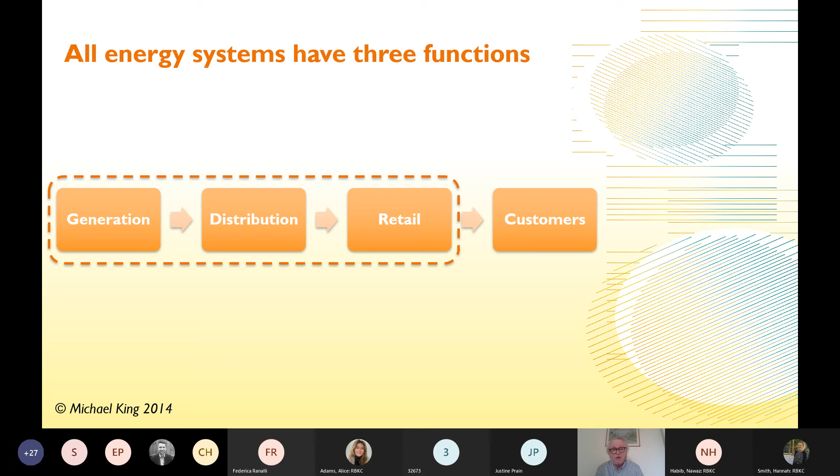Slightly differently with gas, the fuel is produced upstream, distributed through the pipes, and then it is converted into heat within the building in a boiler before it reaches the customer as heat. Now, a heat network is pretty much the same thing. There is generation, distribution and retail, but unlike with the traditional gas system, the generation of heat is not within the building, but outside the building, but it still contains those 3 functions. So next slide, please, Hannah.

So this is really to try and explain it. On one side you have the energy centre on the left, and then you have a primary network running around the streets, which carries the heat from there to the building to be served. Within the building, the risers and laterals, as we refer to them, are the secondary system and go through what we know as a hydraulic interface unit into the tertiary system, which is what most people would call a central heating system, which is the pipes and rads within the home. So next slide.

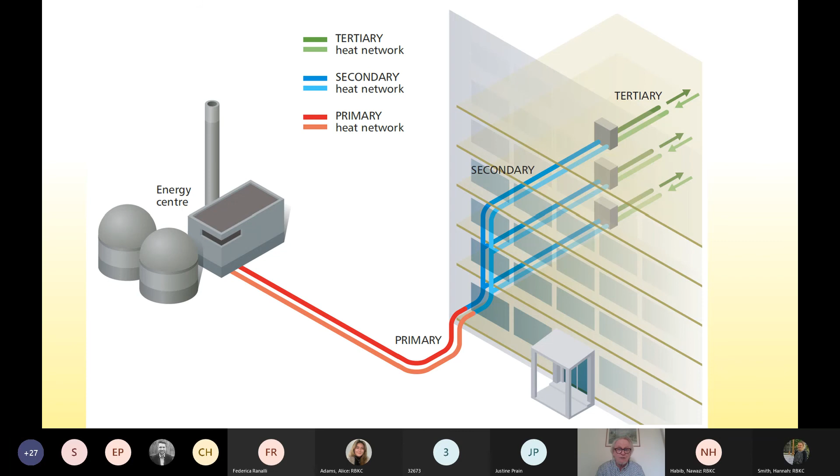So this is describing them. On the top left-hand side, we have the interior of a plant room, and you can see that there's 2 boilers. Generally, there would be 3 boilers in line, and the first one would be to serve summer base load. So that is going to be running for most of the year, and that will be providing hot water for people in their taps, as well as any space heating needed during the summer.

As the winter kicks in, the second boiler switches on, and then at the peak the third one switches on to meet peak load. Now, in this particular scenario, you see the one at the far end is a green box, and that is a CHP unit. And that is generally used to serve base load so that it is running as much as it possibly can, generally about 18 hours a day.

And a CHP unit is in essence a big truck engine that turns a generator. So it runs on gas, it turns a generator which produces the electricity, and the heat is recovered from the engine block. In any reciprocating engine, you have cavities going around the engine block to stop it overheating, to extract the heat from it, because otherwise there's a danger that the piston will fuse in the cylinder and the whole thing will seize up. So that water circulates to keep the engine cool, and in a CHP engine, that heat is recovered from the engine and is put into the heat network.

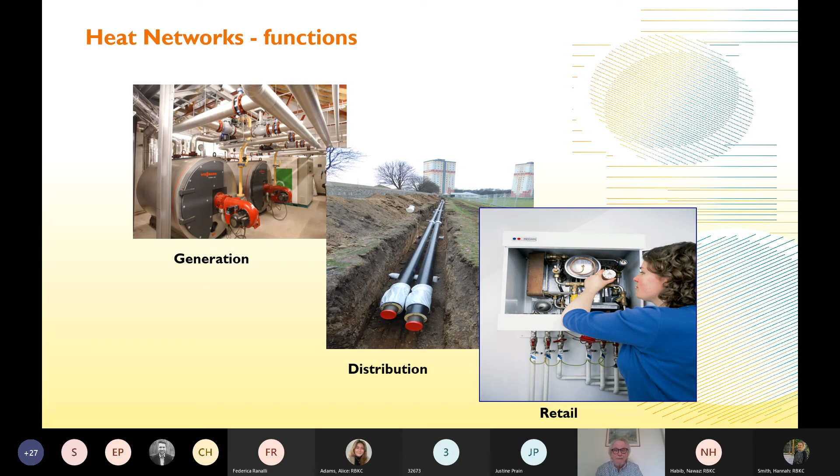So this is a slide from BEIS, and it explains what a heat network is. On the right, you can see all the different types of buildings that can be connected. Public buildings, off-gas grid buildings, so these ones don't have gas connections but could be connected to the heat network. Flats, hospitals, industry, universities, education, retail parks, swimming pools, and

over on that side we can see greenhouses, and it's something that Hannah and I are talking to somebody about. But more importantly, in the plant room, which is the big circle on the left-hand side, the first circle within that, in the lower right-hand corner, is if you had just a straight boiler. Now that could run on gas, oil, or biomass, electricity, solar thermal, or indeed chillers if it's providing cool water instead of hot water. All of that is fairly straightforward.

But on the bottom left-hand side we have a series of different things that this could run on. And these are different sources of thermal energy. So it could be geothermal wells, it could be biomass, it could be solar, it could be a whole range of different things, including recovered heat from other buildings, from industry, from energy from waste plants, and these sorts of things.

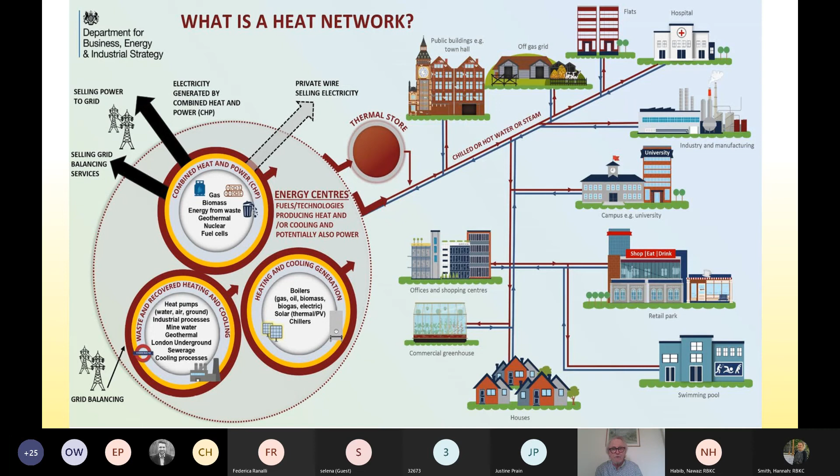Now, having that kind of balancing is what we call flexibility services, grid balancing, and that is a product that you can sell. The company that operates the grid, National Grid, will pay you for doing that. Now then, Hannah, if we could go on to the next slide.

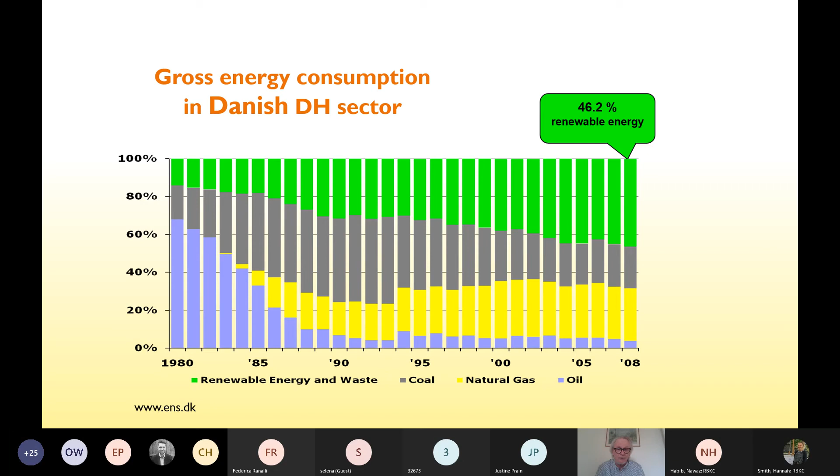So one point I want to make about heat networks is it's a way of bringing on renewable energy. I mentioned all of these different sources, geothermal, heat from sewers, which is something that we're considering doing at Notting Dale. And all of these technologies are ones that are too large for individual buildings. So having a heat network enables you to accelerate the penetration of renewable energy into the heat sector. So next slide, please, Hannah.

So what are the key requirements for having a heat network? Well, the first one is heat density. Those pipes cost a lot of money, so the closer the buildings are together, the less pipe that you need, and so consequently it is more viable in towns and cities. It's not exclusively towns and cities, it can be in rural villages, but the buildings need to be tightly packed in order for it to work.

The other feature about heat density is the age of building, because over the past 150 years, buildings have got progressively more energy efficient. And so consequently, very new buildings don't actually require very much space heating. They still require hot water, but not much space heating, whereas older buildings, and the majority of Kensington and Chelsea is made up of older buildings, are quite leaky in terms of their heat energy efficiency, and therefore that is a contributing factor. The second point is load diversity.

On the right, you see a whole load of load profiles. These are how people use heat energy during the course of the day. At the bottom is a typical load profile for a residential user. It has a big peak in the morning, it dips down, comes back again at lunchtime, and then when people come home from work at about 5 o'clock, it has the evening peak.

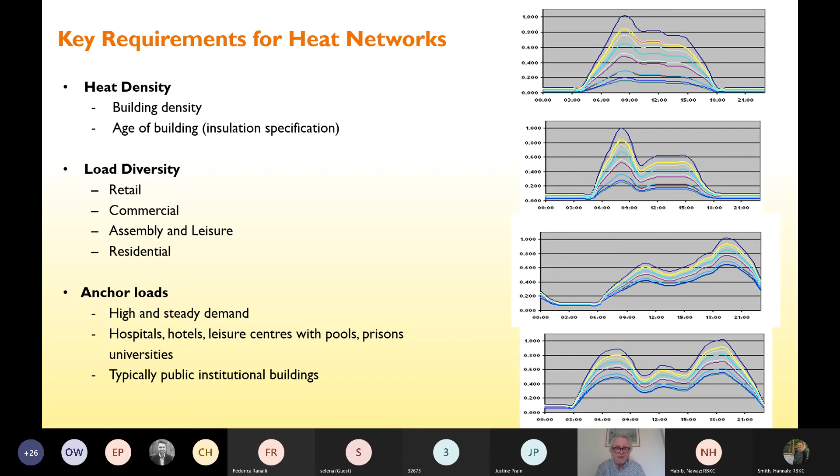The last feature is anchor loads, and these are the ones that really form the cornerstones of doing a heat network. So at Notting Dale, we've got the Leisure Centre, the Academy, and Baseline Studios, and those are good anchor loads because they're continual, steady users of heat, and you can then build the network around them. Typically, these ones are in the public sector. So next slide, please, Hannah.

So just flashing through the history of heat networks, people often describe it as innovative. As you can see there, it's been around since Pompeii, when people were using geothermal energy to heat the town. However, most people regard Birdsill Holly, a contemporary of Thomas Edison, as having established the first commercially viable network in Lockport, New York.

Now, over the course of the years, generally speaking, through first, second, third, fourth, and fifth generation, the temperature of these systems has dropped. Originally, steam contained in concrete ducts, and the biggest one in the world is on Manhattan Island. So when you see a Batman movie with all the steam coming up through the pavement, that's in fact a leaking heat network. That is not an atmospheric effect.

They also only have single pipes because they blast this steam through. Within those iconic buildings in New York, they take the heat, but then the water is distilled out for drinking water and for use in the toilets, things like that. They don't have a return.

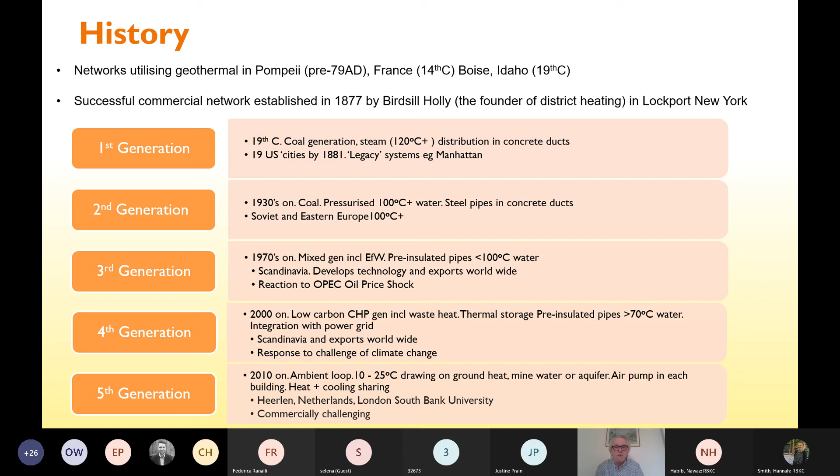However, that is commercially challenging because of the differential price between gas and electricity. Electricity, up to 19 pence per kilowatt hour. Gas is only about 2 to 4 pence per kilowatt hour. So very difficult to do, but it has been done in Heerlen using mine water heat, and in South Bank University on the other side of the river. Okay, next slide.

In the UK, it was first proposed back in 1622 by a Dutch engineer called Cornelius Drebbel. This is after Sir Hugh Middleton brought clean drinking water in from Hertfordshire through the New River to a depot just behind Sadler's Wells in Clerkenwell, and that provided fresh drinking water to every house and building in the city. And Cornelius Drebbel's idea was, why couldn't it be hot water, which you could then use to heat your houses? So nothing happened.

But in 1901, the first system was built on the South Manchester Loop, and Bloom Street Power Station is still there, no longer a power station. It's inside the gay village within Manchester city centre.

And that kind of system continued until the 1980s, when it was decommissioned because by then all this North Sea gas had come ashore, and it was so much cheaper that people peeled off until only one customer was left on, and they couldn't afford it because all the costs were then on one customer, and so it was decommissioned. Funnily, now they're actually reinventing the whole thing.

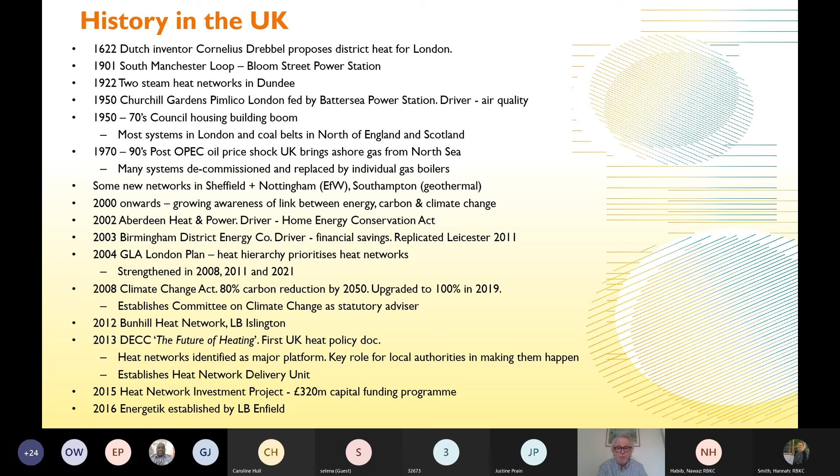So next slide. Just to show you some pics of around the country. It's happening all over the place. That big white thing in the centre there is the new Tower of Light by the Bridgewater Hall in Manchester, serving the new heat network serving the south of the city. Clockwise, up the top there, centre is King's Cross. The whole development behind that is on a heat network. Over to the right is the approach road to the Blackwall Tunnel, and that is the plant room serving the whole of the Greenwich Peninsula.

Below that is Aberdeen. Below that is Birmingham City Centre. To the left of that is the thermal store for the Bunhill network, which further to the left up the street there is extracting heat from the Northern Line. Above that is the energy from waste plant in Sheffield, with a whole complete network in the city centre there. The red and white thing is the Southampton station, and the car park behind it, which used to be Toys R Us, the geothermal well is behind a small chain link fence opposite the station. You can go and have a look at it.

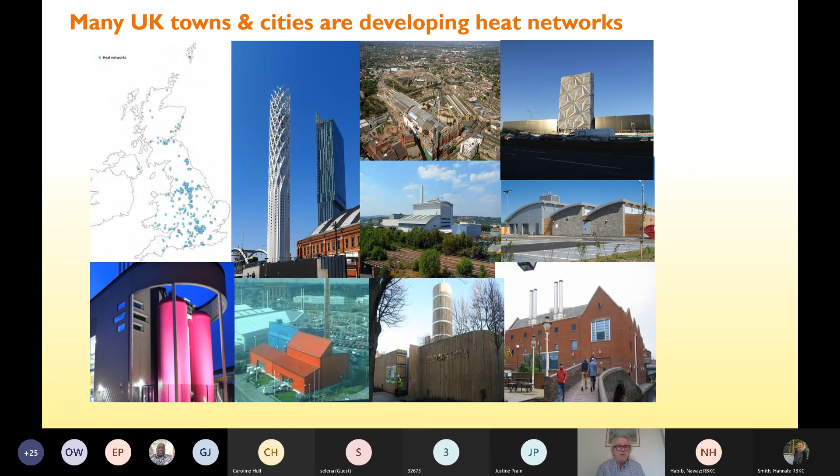And on the left there is Gateshead. The whole of the south side of the Tyne, opposite Newcastle City Centre, is now on a developing heat network. So next slide. Just a few examples from other countries. The top left-hand side is the Spittelau energy from waste plant, and the external treatment is by the local artist Hundertwasser. And that is now a tourist destination. People go on bus tours there to see this fantastic building.

On the right is the famous ski slope in Copenhagen. It's often referred to as being a power plant. It's not. It's a combined heat and power plant. It's also supplying Copenhagen, and 99% of all of Copenhagen is on a heat network. Down on the bottom left-hand corner, that is a geothermal power station providing heat and power from all the volcanic activity in Iceland to Reykjavik, which is 99% on a heat network.

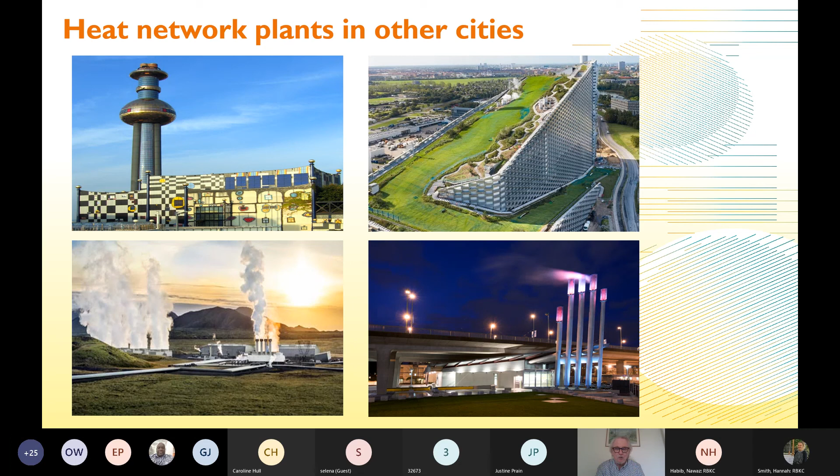On the bottom right-hand corner is Vancouver, where they're extracting heat out of the sewer there. And those purple flues on the top, they turn red when it's actually working at its peak, and phase out to blue when it's not using much heat. So next slide, please.

So what this is, we are actually trying to do this at Notting Dale. As I mentioned, there's two existing heat networks at the end of their time. So we want to replace those, integrate them, bring on some of the surrounding buildings, including the Academy, Leisure Centre, Baseline Studios, North Kensington Resource Centre, and the Community Centre. And this is going to be co-designed with the residents.

A driver is to actually provide them with low-cost energy. So we're developing a price promise for them. We'll have a new renewable energy centre. Initially, that's going to be run on air source heat pumps, but we hope in the future we'll be able to extract it from the sewer or even an aquifer below there.

And then we're going to expand it to a further 500 to 800 additional homes in the Notting Dale ward. And once we've established the model, we hope that we can then apply it to elsewhere in the borough. So next slide, please.

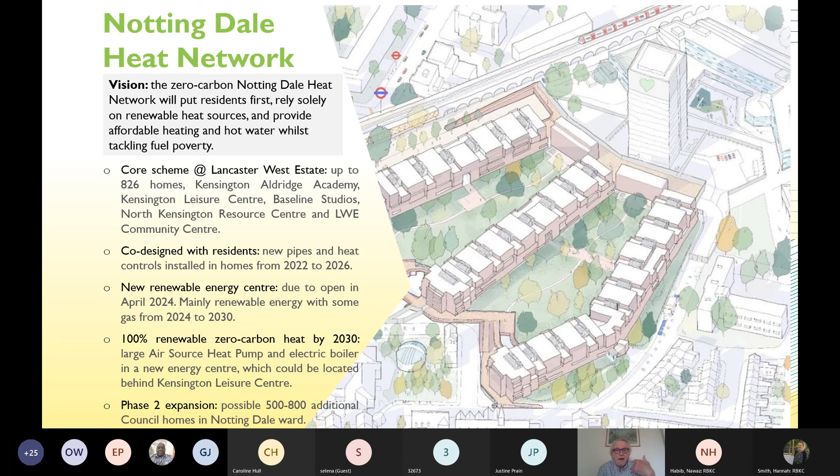So now we're flipping back from looking at the past to looking forward. As I mentioned, the government's committed to net zero carbon by 2050, and that is across the entire economy, including heat, which also is the most difficult to decarbonise. With electricity, you can flip out the power stations for wind farms and nuclear power stations without troubling the people in their homes. Within heat, you actually have to start getting involved in people's homes, and that is very, very difficult.

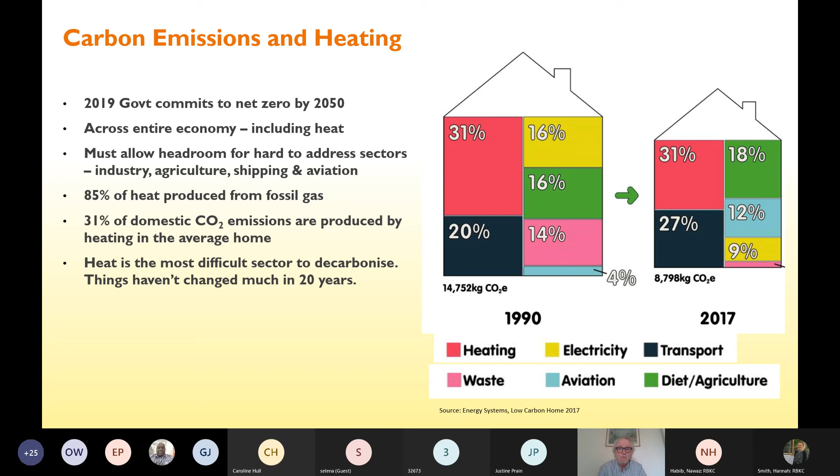But 85% of the heat is produced from fossil gas in this country, and we need to get off of that. And nothing has very much been changing since 1990, as you can see on the right hand side; between those two dates the carbon emissions of heat remain at 31%. So next slide.

So this is a timeline of what's happening: from 2025, no new buildings that are being newly built can have a gas network connection. From 2030, existing boilers cannot be replaced in public and commercial buildings. And then from 2033, in fact Climate Change Committee have slipped that to 2035, they will be phased out in residential buildings. So the challenge is, what are we going to do instead?

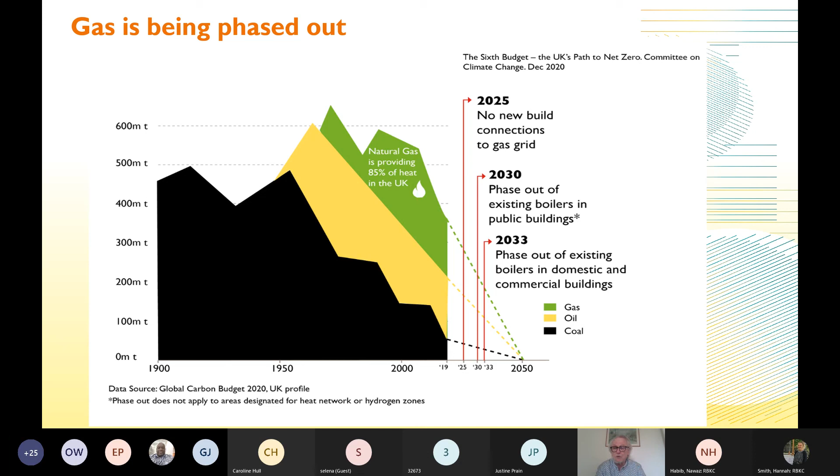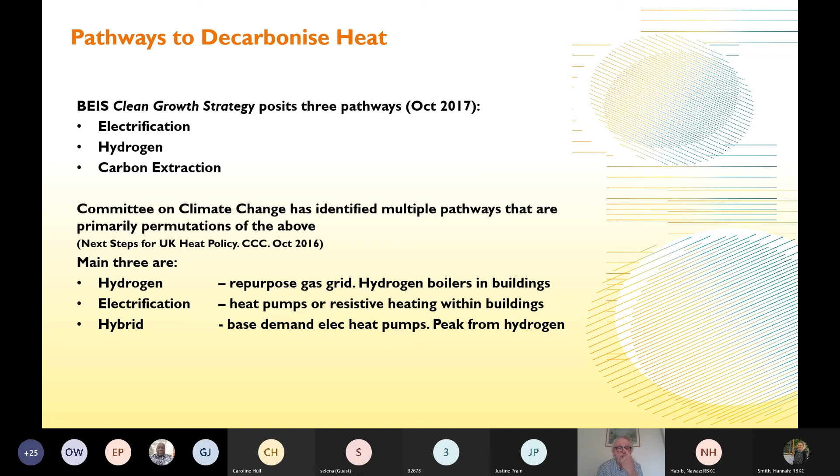So next slide. So BEIS, in their clean growth strategy, outlined three possibilities. One is electrification, hydrogen, and the third one is carbon extraction. We don't need to trouble much with carbon extraction because that is mainly about reforestation, peat bog restoration, and carbon capture and storage. So the Climate Change Committee looked at those and essentially boiled it down to three, which are hydrogen, electrification, and a hybrid. And I'll run through these in the next slide. So over to the next slide, please, Hannah.

One is electrification. So there's heat networks, there's power networks all over the country, so it is quite possible to flip them over. It's likely to be heat pumps, because for 1 unit of electricity put into a heat pump, you extract 2 to 4 units of heat out of it. It's rather like your fridge, in that it's got something that extracts the heat out of the container with all your eggs and butter and milk in it and dumps it into the room. A heat pump does exactly the same, except it captures the heat from outside, from water, sewers, or the air, and actually pulls it inside the building.

It's very efficient. And that's why it's important, because if we just go for resistive heating, which is only 100% efficient, and if we're going to electrify all our transport, there's going to be a massive increase in upstream distribution and generation. So the difficulty, as I mentioned before, is it uses high cost electricity, and it doesn't provide power revenues as it does with CHP. But it is market ready and available out there, but at a price. It's quite big. It costs £16,000 a unit, and it has difficulty turning up and down, so it has difficulty meeting surges.

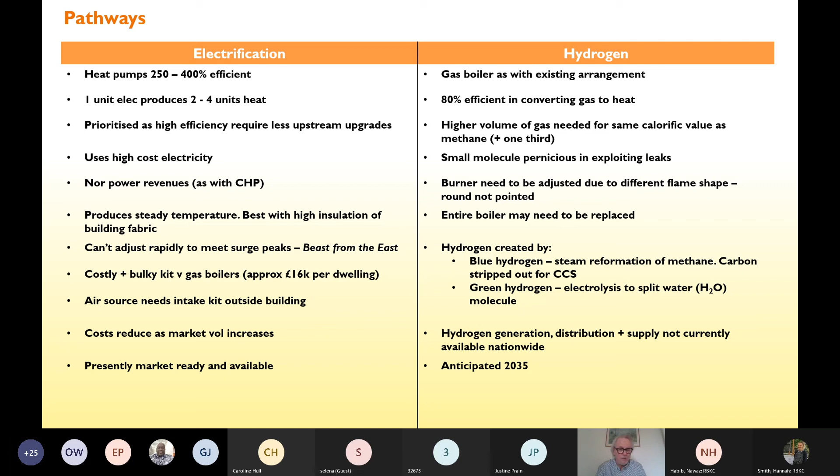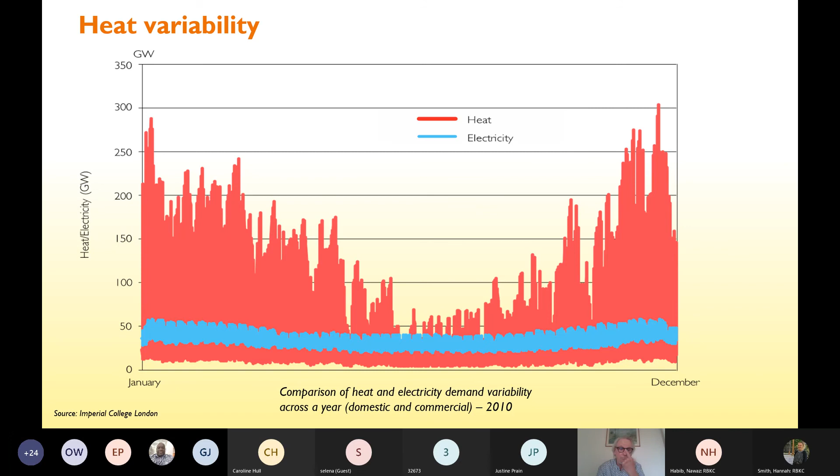So next slide. By contrast, if you have a hybrid approach, say electric heat serving that base winter load, and then hydrogen for the peaks, winter over summer, but also those surges in demand, that could do it. And the industry is currently developing in-house units that are hybrid heat pump hydrogen boilers, but they are very bulky. And also, of course, you can only tackle gas grid properties with those. But it can produce net zero carbon at a reasonable cost, which I shall come on to in a moment.

However, I make the point that heat networks can actually do this very easily, and can blend not only heat pumps and hydrogen, but all sorts of other technologies, as I outlined in the slide at the beginning. So you can put in additional backup capacity, backup generation, which is very difficult within a house because of the space limitations. And you can also blend in other sources such as waste heat from other buildings and energy from waste plants. But also, once it's installed in a person's house, you can swap out the generation plant for something else without messing with the people in their homes.

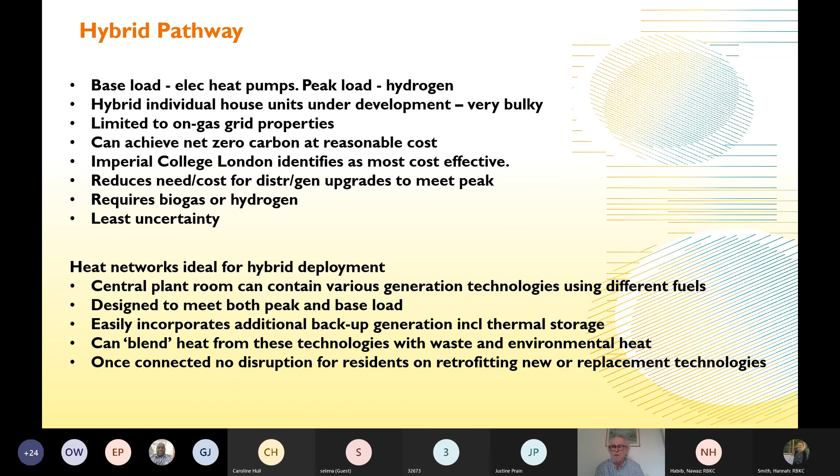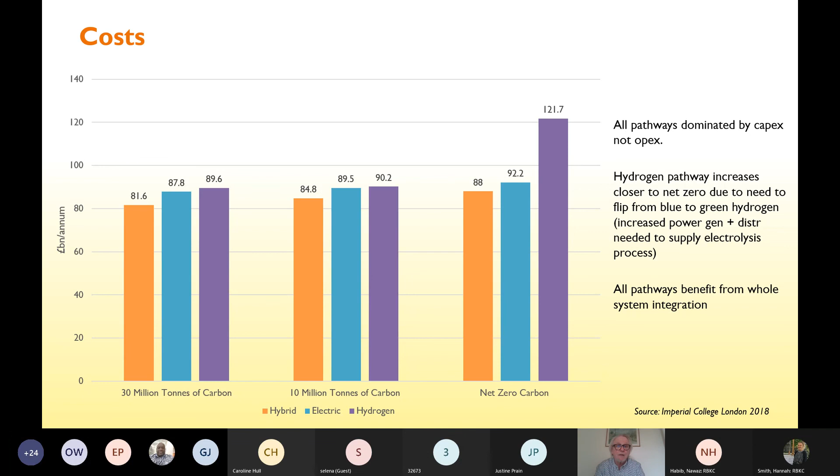So my last slide is, what pathway, these different technologies, where are they going to be done? The Climate Change Committee suggests that in industrial areas such as Teesside, Grangemouth in Scotland, and the South Cheshire Basin, it will be hydrogen, because hydrogen is required for those industries. So it justifies the expense of investing in carbon capture and storage. But if you've done that, you might as well connect up the buildings in the vicinity. That is not the case for places like London, which are very, very dense, so they're very suitable for heat networks, and so hydrogen is not likely to be the selected opportunity here.

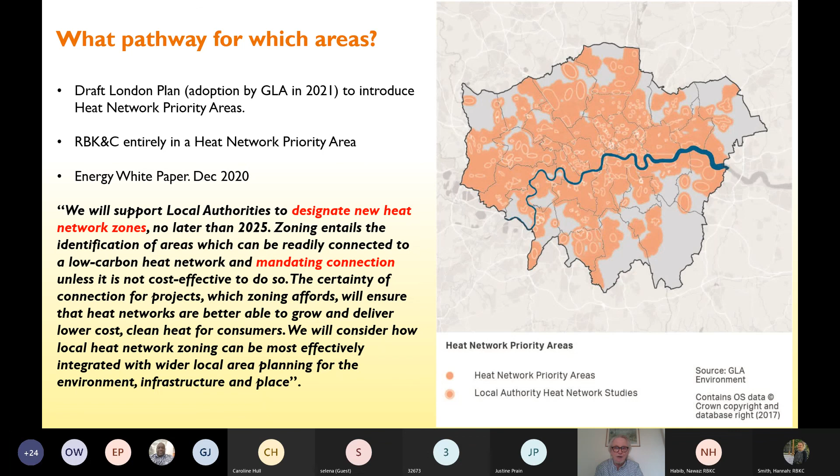In the new London Plan adopted at the beginning of this year, they have said that they are going to introduce heat network priority areas, and they've got a team of consultants working on that. And as you can see from that map, Kensington and Chelsea is wholly within one. And then in the Energy White Paper, the government have said that they are going to introduce heat network zones by 2025. So all of this is happening. So that's it, Hannah. I think that's my last slide. So yeah, open for discussion and any questions that anyone would like to put.

Do you know roughly what proportion of the UK is currently on a heat network? What kind of proportion of buildings would it make most sense, in terms of efficiency, to be on them in future? Okay, so because of the echo, I'm not sure I got the question right, but I'll try to answer what I think it is.

Previously, the government collected figures according to fuel type. So they had ones for electricity, gas, this, that, and the next thing. They didn't do it by service. So the figure that they did have was approximately 2% of the total heat of all the building stock was on a heat network in 2000, and that figure has been used ever since then. In fact, it's most probably an awful lot higher because of the GLA's London Plan new obligation, and so all of these new tower blocks that are going up are on heat networks, so it's most probably higher.